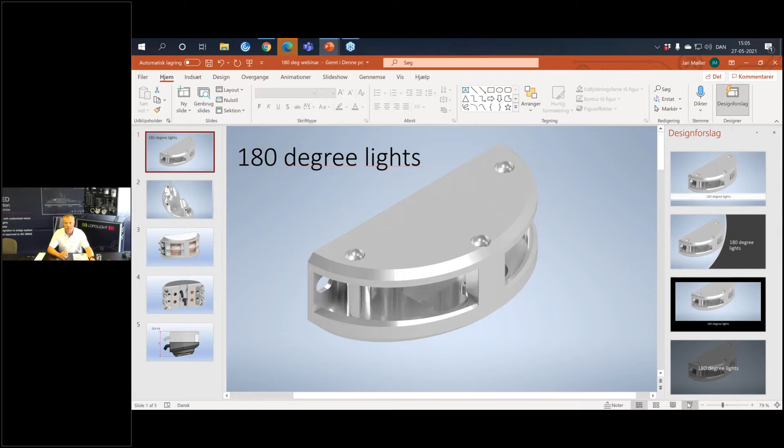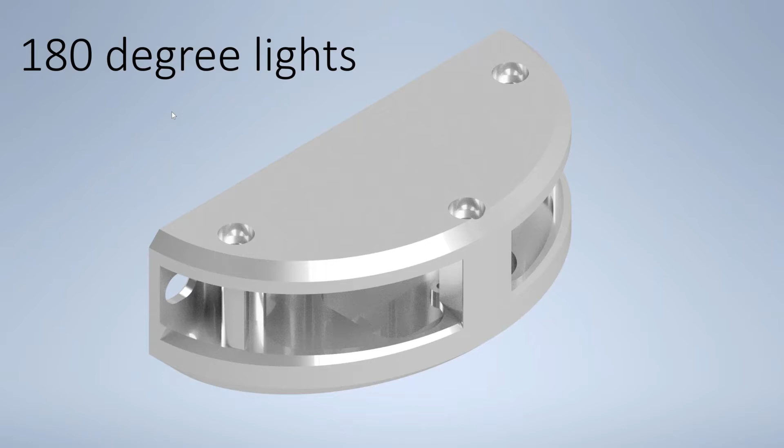You saw in the newsletter a slight adjustment to the 180-degree lights we have been showing you earlier. Let me kill my camera so you can see better. This is the final iteration. What we're happy to say is the design is more compact than today's, easier to mount, and you could even say it's more elegant. It's quite intricate, the design behind it. It allows to be stacked, and compared to what you've seen before, it's even more compact. The connection for the stack light is not a backplate as we're used to, but some latches, which you can see in the picture here, and a screw insert on the front that is invisible.

So pretty nice, and we are about to start the machining of these, and have agreed a fast track system. But the whole of June will be taken up producing not only the aluminum but also the lenses, so there will be a month where we cannot deliver any vertical mount 180-degree lens.

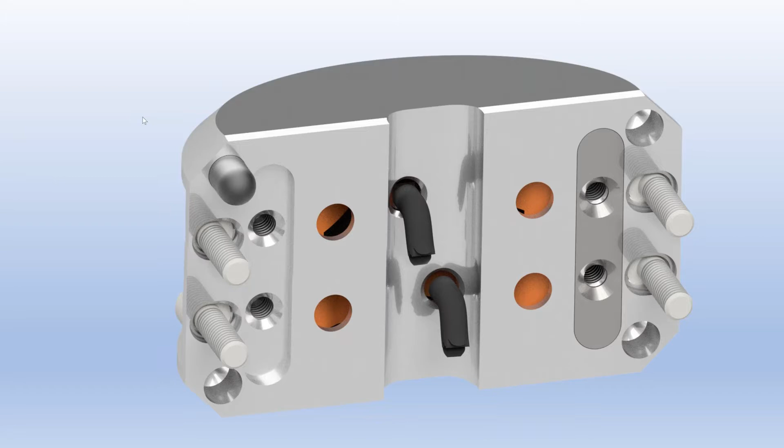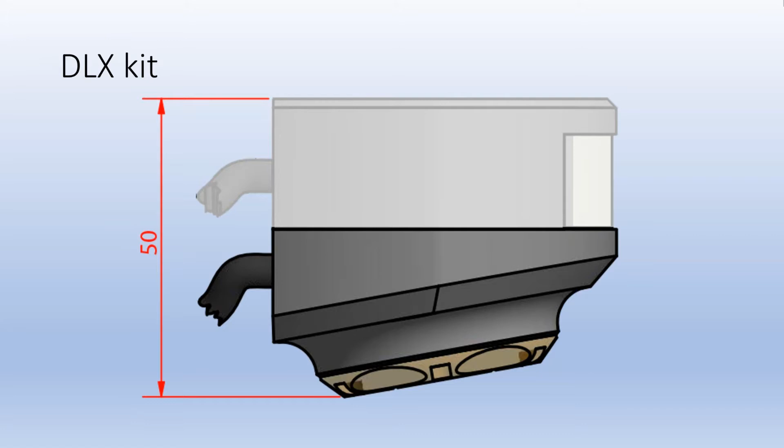We are conscious that a number of customers already have a stern light, it could be the latest generation, the 30106, or even the 301-106, where you basically imagine where the cover normally sits, this deck light combination goes - oops, the screw was longer than I thought.

So basically, take off the cover of the existing stern light, and in today's iteration the cover sits downwards, so that's not a problem, then latch on to that. With the kit there's 2 screws, and the screw holes for the cover hold it, and then it's only the powering left, it's quite straightforward, and you will have a happy customer.

The pricing of it is very close to the price differential between those 2 lights. A new version of the prices will come out very soon. If a customer has the old version of the stern light, you remember the old version where it has the exact outer dimensions, but the cover sits on the top, and there's an option.

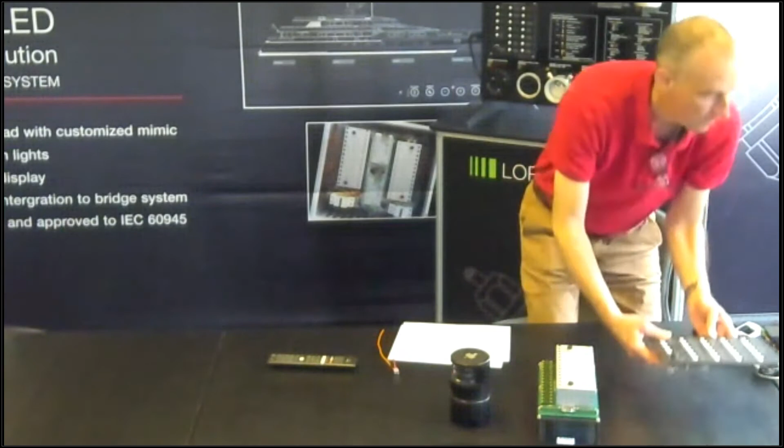So we have developed, as you know, another type of interface, which is another microprocessor, you could say, that feeds a video monitor, and on this video monitor we show an outline of the vessel and some programmable buttons and options. So here again we have a human machine interface connected to this computer as part of that. It controls this one, that again controls the light.

That's all good, that's fairly understandable, and it turns out to also work in the real world. This is something we have realized that is actually quite basic, or quite necessary, in order to sell our basic product, which should only be the light.

If we imagine a system set up so we can control lights here, we can actually simulate that in various ways, but also online on some secret web servers we have, where we can show exactly how...

And Jan will now find that, because he goes straight onto a web browser here, and he will share that screen with you in a second.

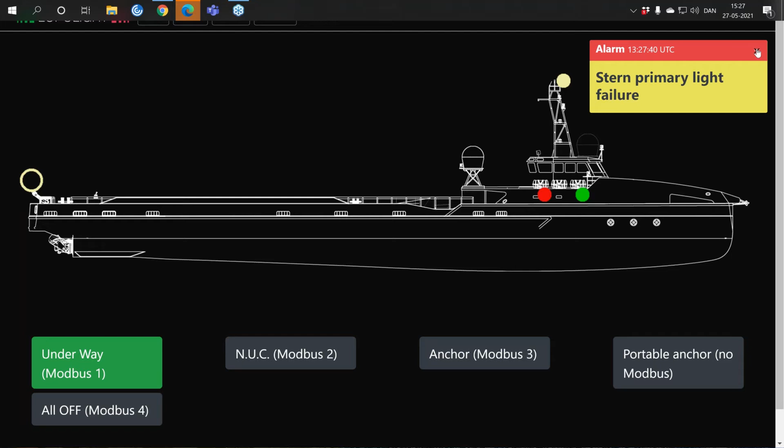As you can see now... no. And normally this would mean that there's an audible alarm as well. So I mute the audible alarm, and then I remove the error condition here.

We could also go in and now you can see here the spare light in the set, the secondary stern light has kicked in. Of course, we can turn on our not-under-command lights. They're being represented here on the screen just as a dot, and that dot is actually just a little GIF that the customer can make any little GIF they like.

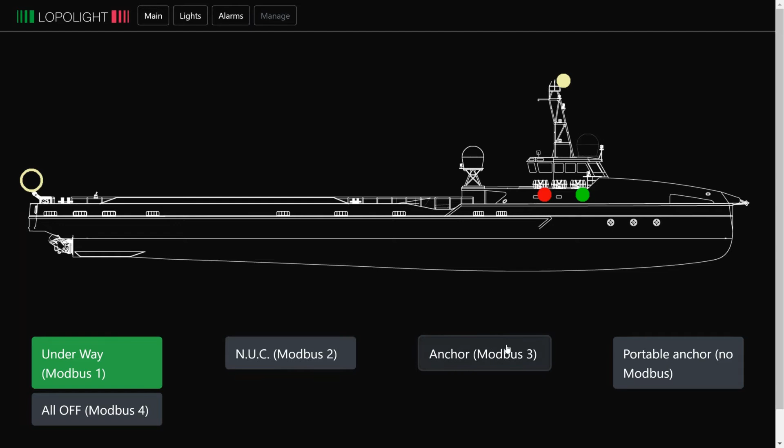We can turn this off, and in this case, I have programmed it in a way so when we hit the anchor situation, when we turn on the anchor, it will automatically turn off the underway button. Let's see. So underway turns off automatically, and now we have our anchor light. Only one anchor light in this case, but it's sort of for demonstration purposes.

Aground mode here, if we're aground, and we can even program a little all-off button. When you come into port and everything is supposed to be turned off, then you have a positive indication that everything is off.

There are no limits to how many buttons we can set up here. It could be dredging on starboard side, dredging on port side, all kind of things. It could be a tugboat towing over 200 meters and under 200 meters, all these various combinations.

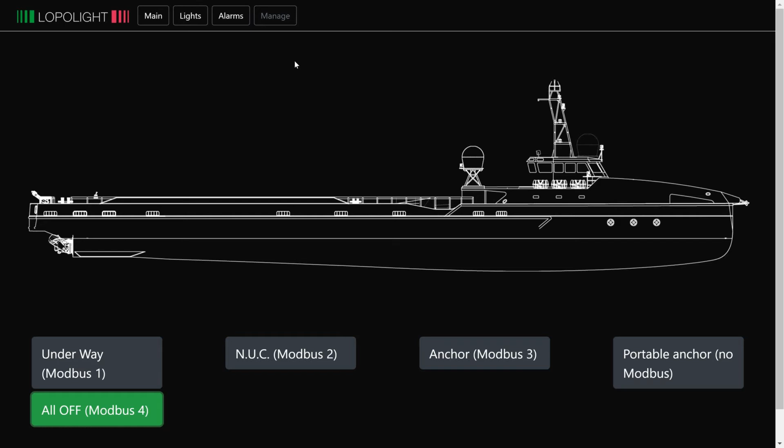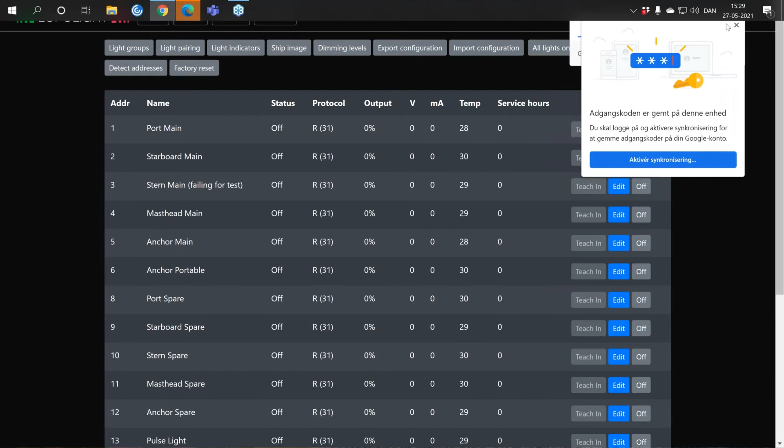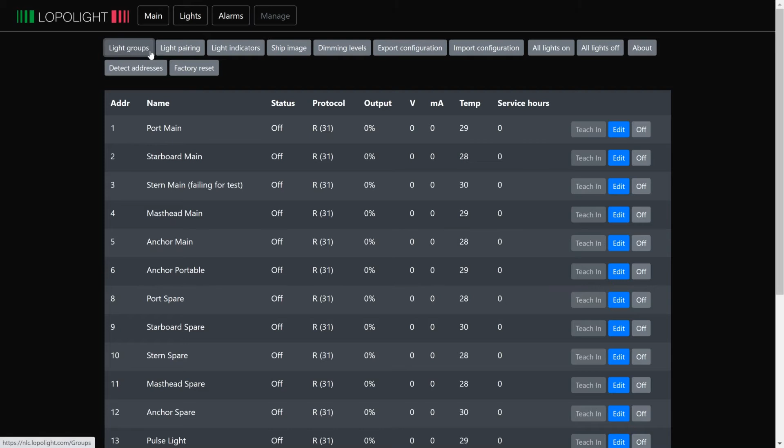Because what happens is actually we go in here, and in the management side, it normally is password protected because it's not supposed to happen every day on an everyday basis. So you go into the light groups, you could see before, you will recognize the... I don't recognize anything, but right now it's not going in there. Just a second.

So here you recognize the text you just saw on the main page where you go underway. Let's take that. If I go in and edit that, which is super simple, then we start defining what shall happen when I activate the underway group button. In this case, nothing shall happen to the not-under-command set of lights.

But the anchor lights, the anchor light group, I would like that to turn off. Nothing happens to the portable anchor. So some text we put in here, and all off, of course that has a special meaning. So here we can simply set up very simply what every group button shall do when you press it.

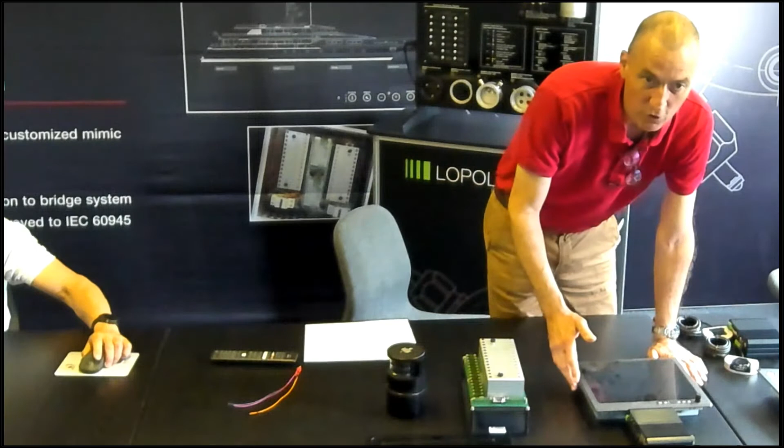Now, the only thing we should show here was actually to give you a little impression that we can really control things in a very detailed way when using this interface. If we go back to the first interface, the old one, which is still very popular, it's a little limited. We cannot show you a picture of the ship, for instance.

Now, we have learned that customers, once the project starts to ripen, they have very often a desire to interface again to our systems. It could be simple NMEA 0183 that goes into these systems. We can see the status every second, as on any other NMEA telegram that you quite like to know. We can control a few things with it.

We can do the same if we use the button panel. We can actually control quite a few things via this old-fashioned but quite efficient NMEA interface.

But now these days we also see that some systems, typically a double-ender ferry, we would like to have an interface which consists of another computer that sits in the defined wheelhouse, and these two systems then talk together. So we have one monitor in wheelhouse number one, and another computer, another monitor in wheelhouse number two. They communicate via a web interface, so it's HTTP protocol basically, which is an interface.

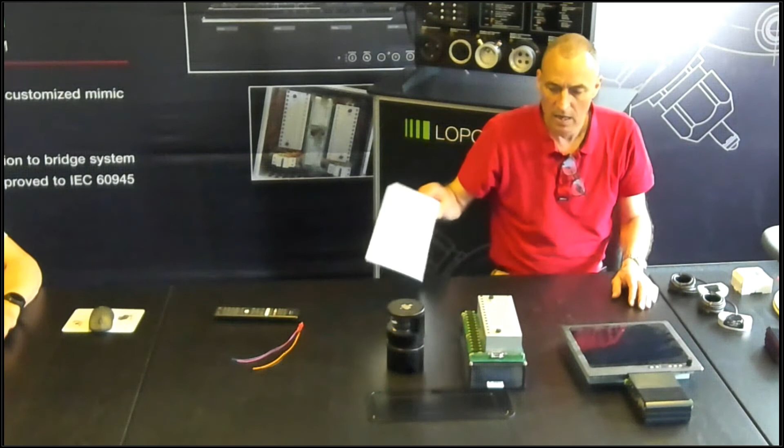In some cases, we would have customers coming in and say they would like to control things from a PC-based environment. That could be where they use the web server in the main system and the web browser in their system, but it could also come down to APIs. You may not know what an API is - it's a data command you can send via Ethernet. But many of your clients will have a technical department that will be quite thrilled when they find out they have a fine way of accessing our systems from their existing backbone system on a ship.

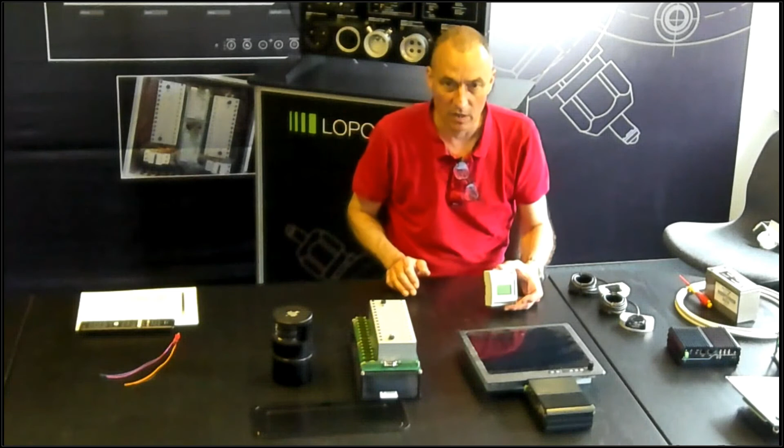Another group of customers don't want to use APIs for some reason. They would like to use a standard PLC - it could be anything - and they need to interface to our main control units. Now, as Jan just mentioned briefly, we can offer Modbus via TCP/IP. Again, you don't necessarily have to remember these words, but many of the big customers will ask about these things themselves, and we're getting closer to being able to say yes in all cases, no matter what interface they prefer.

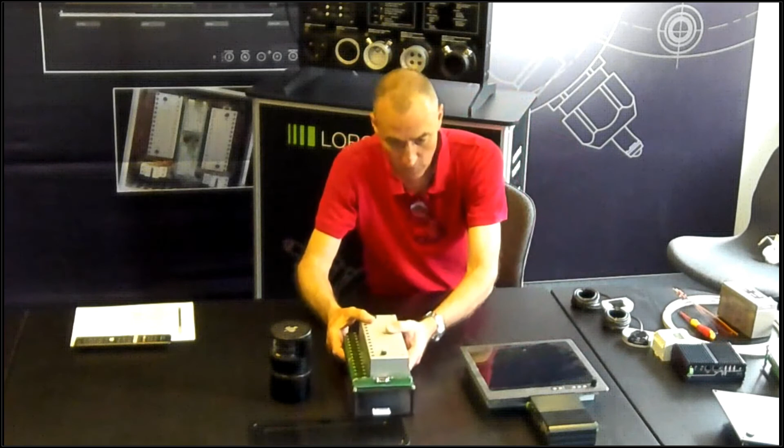But the main buzzword is actually interfacing, and it has turned out that because we can come up with all these solutions, we do get the projects - even in front of very, very big competing companies. That's absolutely perfect.

The story is from a commercial side very straightforward. The chance of us being able to answer any request from a customer is yes, they are there. We have the solutions. We've been through a number of challenges, installations, especially on gray ships, also those who are not always on the surface. We've been through all, we think, all the various intricacies there is. We remain humble about every project and every challenge, but we do believe we have the ability to say yes to any NLC challenge that people will find. And as you will have registered, we mean business.